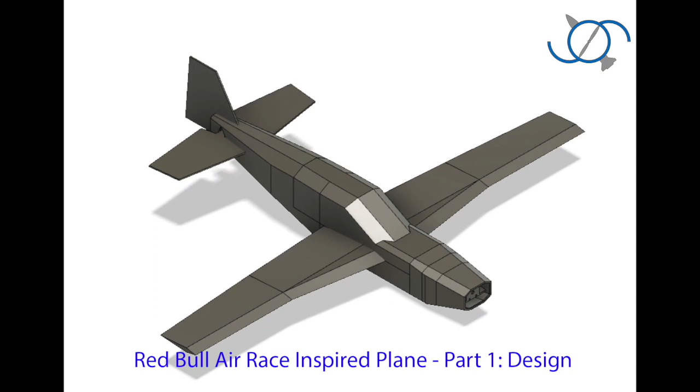Hi, I'm Ryan. I designed and built a Red Bull Air Race inspired plane. I'm making this video because I want to show you what I ended up with, but I also want to give an overview of some of the steps I took to get from idea to flying model, and also to explain some of the build techniques I used and the general assembly of the aircraft.

Before I begin, I have to let you know that most of this was new to me, so I was learning along the way throughout 90% of this process, probably. I have about 3 years of experience of building foam board aircraft and flying them, but I'm a beginner when it comes to designing a plane from scratch and making a set of build plans that are intuitive or at the very least usable. So bear with me throughout this because I know I made a lot of mistakes and I'm always looking for ways to improve, but I still want to share with you what I did. Maybe you could learn from all the mistakes I made, because I made plenty of them.

What's important is that you do what works best for you. You don't have to do what everyone tells you to do. Make mistakes in a controlled environment, learn from those mistakes, and always be open to feedback. So let's get into this.

I broke this down into 4 major parts: design, build, test, and improve. The last step, improve, can be done throughout the entire process, and I actually encourage you to do it throughout the process. As you'll see, I was constantly making improvements. It just makes more sense to make a change as you see it instead of waiting till the end. I just had to put it at the end there because it's not likely that your first iteration will not need to be improved after your first test.

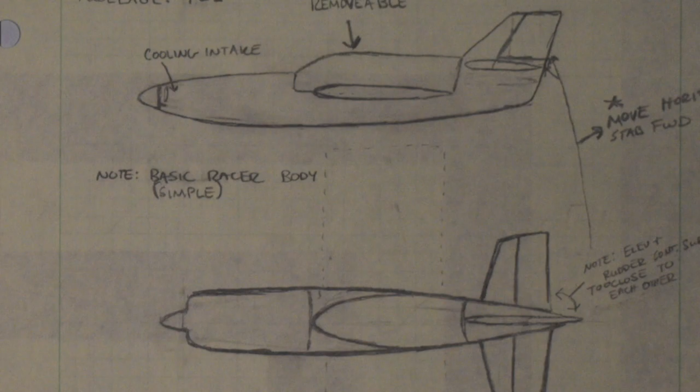I think the profile, to me, has a little bit more of a look of a P-40 and an Me-262 kind of mixed together. I drew a profile and a top view. I also drew in where I would want the wings to be, and also, of course, I added the tail section. So once I made the first sketch, then I took a step back, I looked at it, and I saw that maybe I shouldn't have the tail the way it is.

The location of the horizontal stabilizer in reference to the vertical stabilizer was something I wanted to make a change to. Because this plane was going to be aerobatic, I was going to make it to where the control surfaces had a high throw. With that in mind, I noticed that the elevators would have been interfering with the sweep of the rudder. So I made a little note and said I'm going to move that forward. So I made a second sketch, I moved the horizontal stabilizer forward, and I took another look at it.

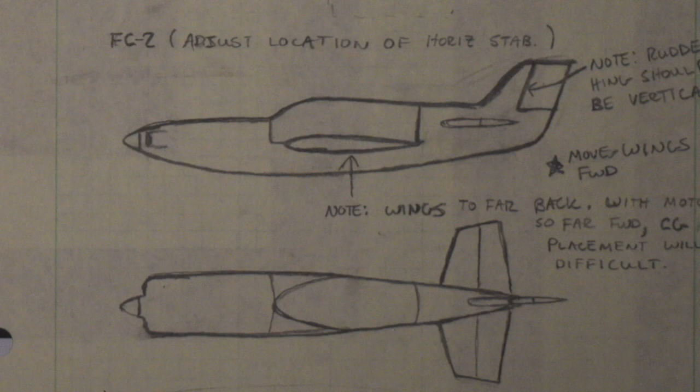The first thing I saw was the hinge line and the size of the rudder. The hinge line I drew angled, probably because I was just in the creative mood and I was trying to make it look cool and streamlined, but you don't want an angled hinge line on your rudder, because when you use it, it will apply a pitching moment to the aircraft. It may not be a big pitching moment, but it's something that is just not necessary.

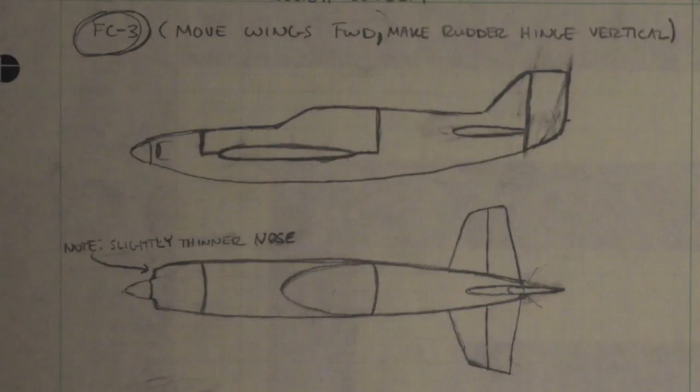So I made a note to make it vertical, and I also decided I wanted to move the wings forward a little bit. So the third sketch, I made these changes, I looked at it, and I was happy with it. I did something similar with the wings. The wings were a little easier to draw. It's important that you make the drawings have a scale appearance in reference to each other.

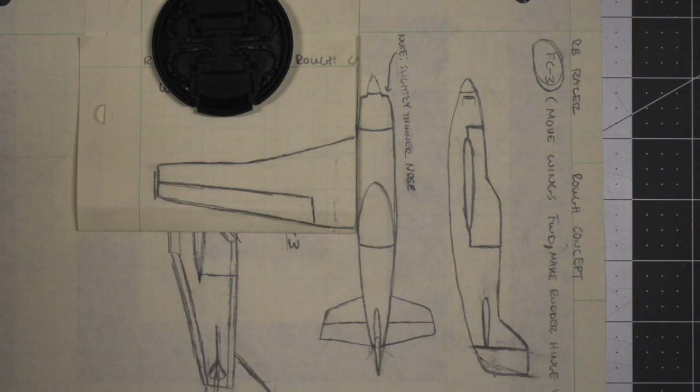This is because later you're going to have to dimension the aircraft and you're going to be using your drawings, and I'll get to that in a minute. But one thing I did with the wings, and because I kept them as a scale appearance, is I folded the piece of paper I drew the wings on in a way that I could lay it over top of the fuselage drawing just to see what they would look like.

That's also another way to help me decide if this is the wing I want, this is the way I want it to look. I've decided on my fuselage, I've decided on my wing design. I need to make a detailed drawing.

And because I know that my model is not going to have the curves that my drawing does, I take a piece of paper, I put it over top of my final drawing, and I trace it, but while I'm tracing it, I'm making straight edges. I'm turning my design from this curved shape into a polygon. It's going to have a lot of sides, as many as you want, it's going to look as boxy as you want, and I basically did it in a way that I thought complemented the actual shape of the aircraft. I did this with the side and the top.

So now you have to decide how big it's going to be. What is it going to look like? How large do I want it to be? The easy way to do this is you choose a major dimension of the aircraft. For me, the major dimensions are the wingspan and the length of the fuselage. I chose the length of the fuselage. I looked around the room. I took two pieces of foam board. I laid them next to each other lengthwise, and that looked like a good length for my fuselage. Measured it, it's 40 inches.

So now what do I do with this dimension? Well, this dimension is going to define the rest of the airplane, but you also have to apply that to your build plans. If the length of the fuselage is 40 inches, how do I know the width of the fuselage, or the height of the fuselage, or the distance between the nose and the leading edge of the wings? This is why it's very important for your drawing to have a scale appearance.

I measured the length of my fuselage. The length I got was 4 3/16 inches. So I divided 40, which is my final, by this dimension, and I got 9.55. That represents the ratio between the scale of the drawing and the aircraft. So the drawing is a 1 to 9.55 scale of the final model. So now I measure the other dimensions on the drawing, and that dimension I get, I multiply it by 9.55, and that gives you your final dimensions.

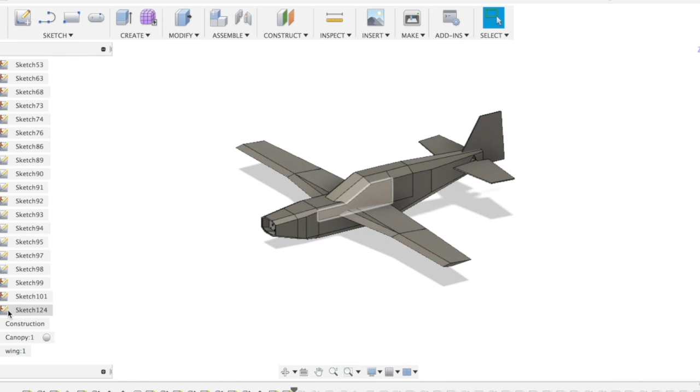So I was familiar with 3D modeling. I used a program called Fusion 360 and I built a 3D model of my plane. The reason I did this is because I knew that I can make sketches out of all the faces, and those sketches can then be saved and put into a program that can orient them in the form of build plans. I definitely used the final dimensions on my detailed drawing for the 3D model.

And when I took all these sketches, they get saved as a .dxf file. Only certain programs can read that: CAD programs, Adobe Illustrator, Inkscape. I used Adobe Illustrator, which does cost money. You have to pay a subscription for Adobe Illustrator, but they have a free trial, and I used the free trial, and I loved it so much I had to just keep using it. Plus, I put a lot of work into it.

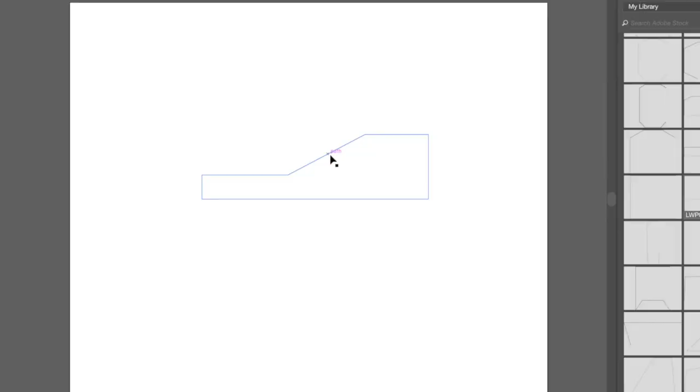Inkscape does something similar to Adobe, but it's free. I didn't use it much. I had already been invested in Adobe Illustrator at that point, but that's an option if you want to go the free route. And CAD you definitely have to pay for. It's a little different, but Adobe Illustrator can take these sketches, I can move them, I can rotate them, I can flip them, and put them any way I want. And that's how I made build plans.